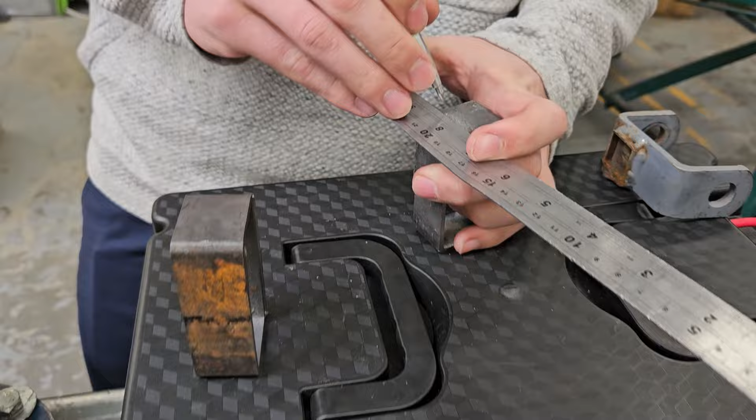So today, students have cut out metal, at least the outside parts. We're going to figure out the inside ones after, because as they weld, no matter how much time we spend in AutoCAD drawing, that distance might change. So let's head on over to the welding booth.

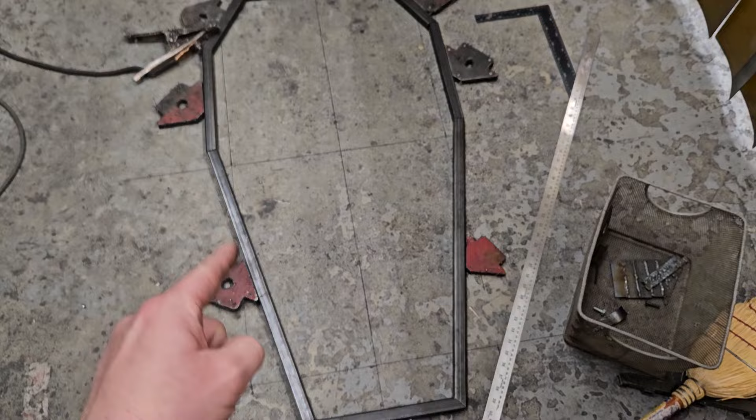So we got our pieces laid out on the ground. We used a Sharpie, a ruler, and a square to draw a basic grid so that visually when we're looking at it, does it look even? We're going to measure those gaps here, here, here, here, all those spots, and then we're going to weld. All right, Chris, what do you got for me?

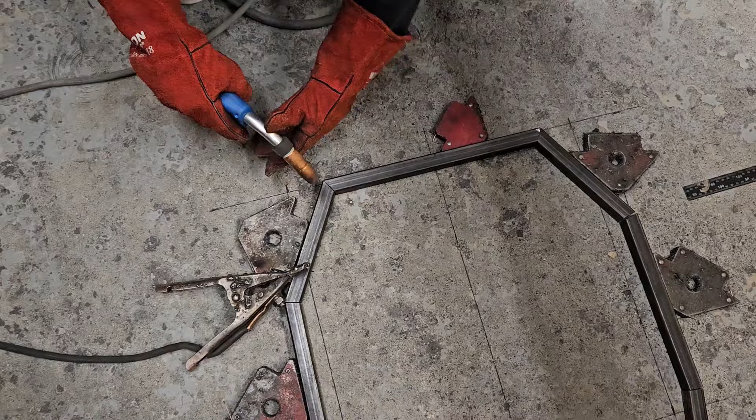Now double check. Did it warp in the middle of that weld? Check out our other spots. There's a little gap there now. What do we need to bend?

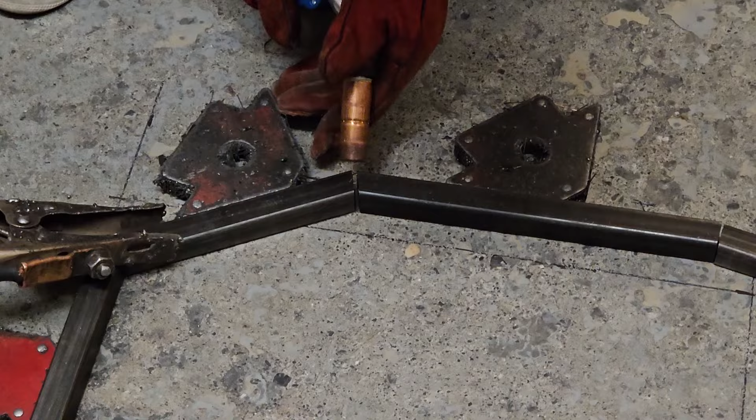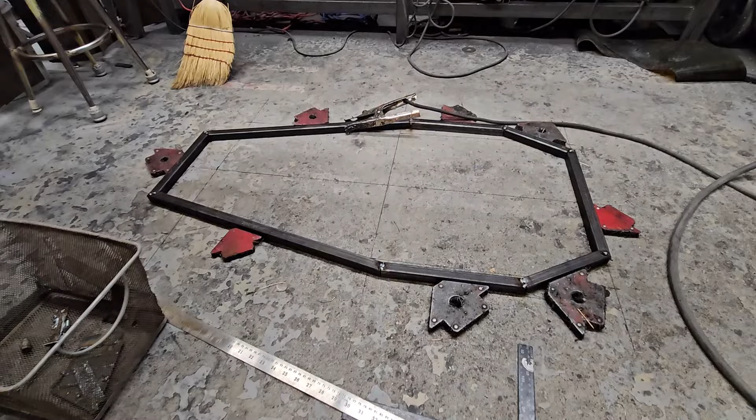Okay, so there's our basic bottom frame.

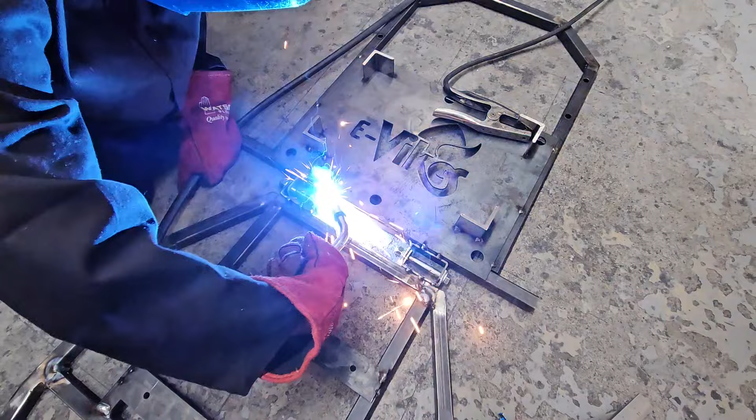Wow, it's gonna bend. Sweet.

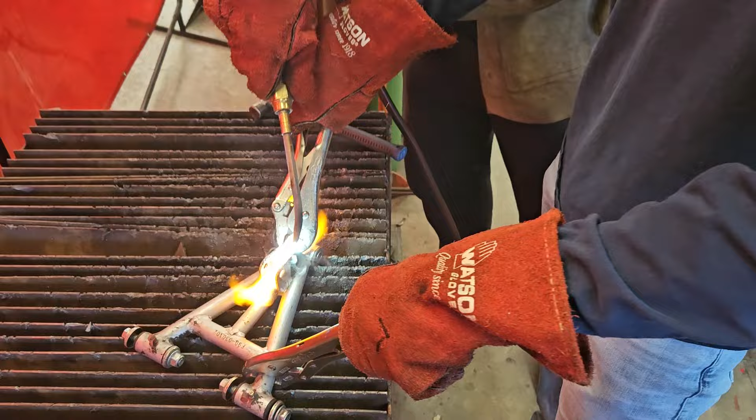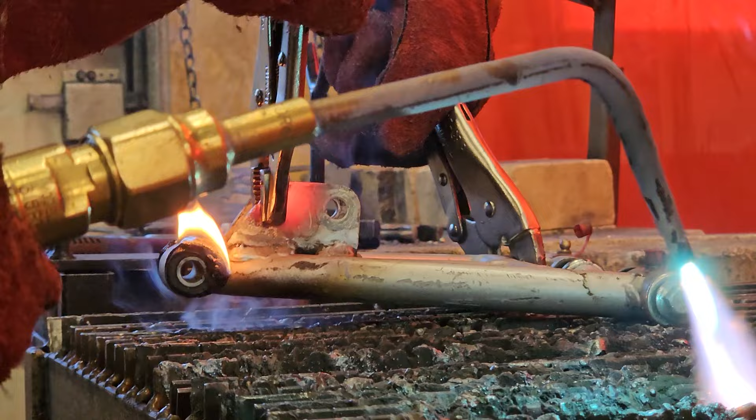Oh no. I've been checking. There we go. That's gonna go here. One of these and one of those is gonna go there.

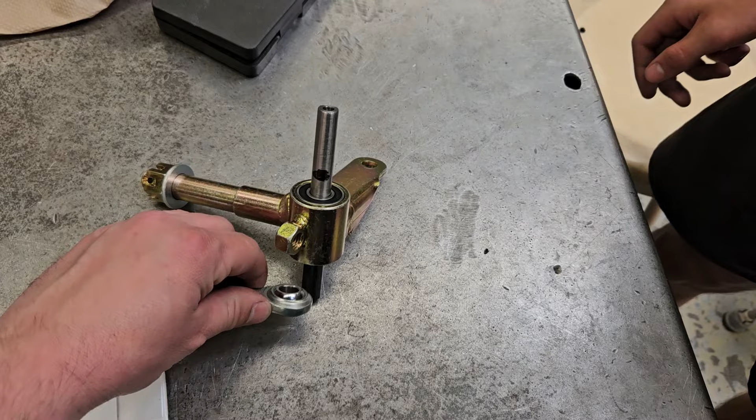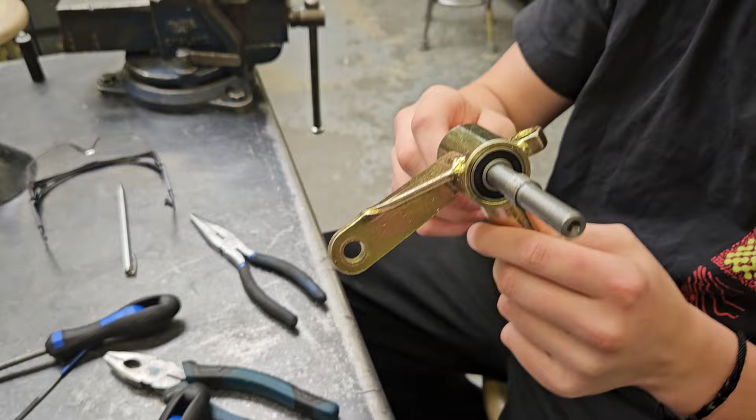Okay, let's throw on the tie rod ends. One at each end. Let's take a look. How's that gonna look there?

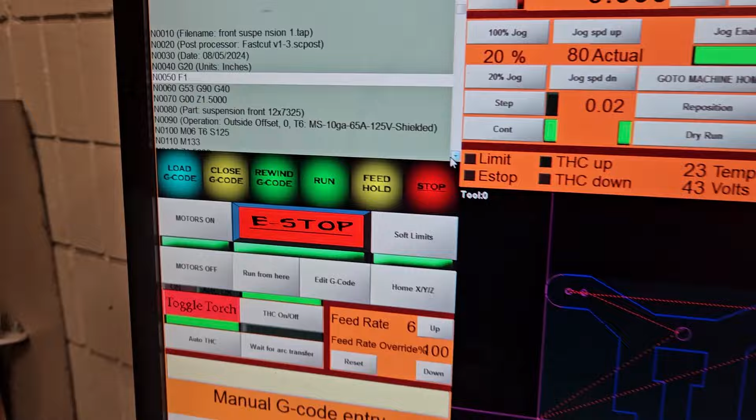That drawing's been converted into pathways and G-code and stuff. Let's send it to the printer. Did I say printer? I meant plasma cutter.

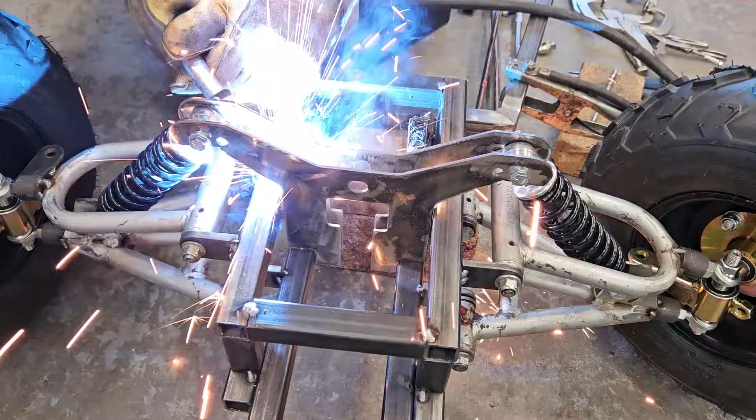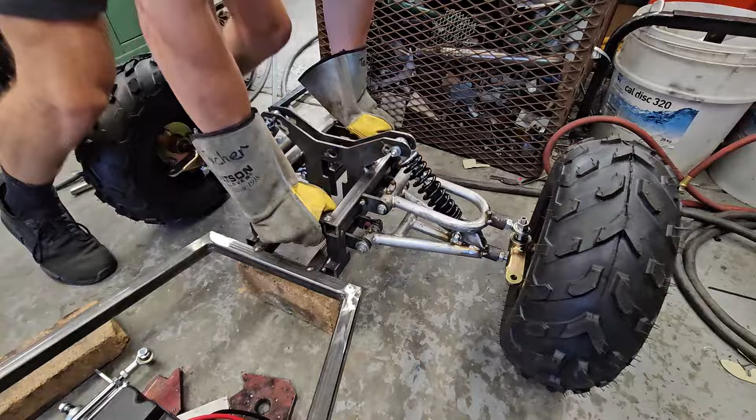We're just testing the wire.

Yeah, it's done. The project's... No, it's not done.

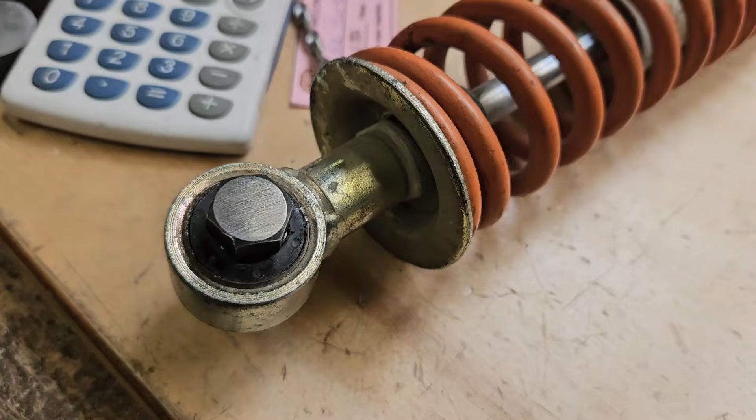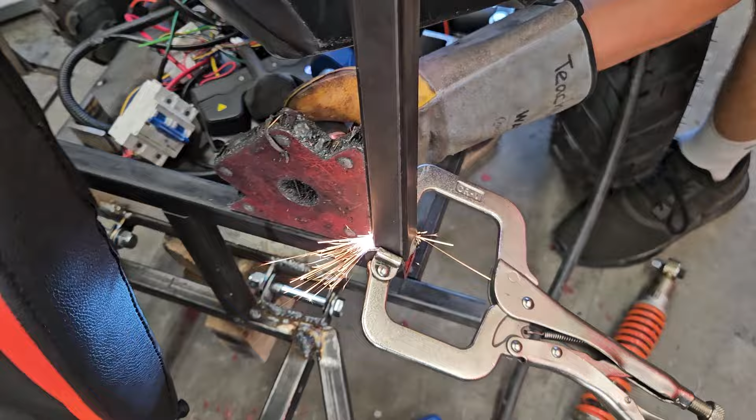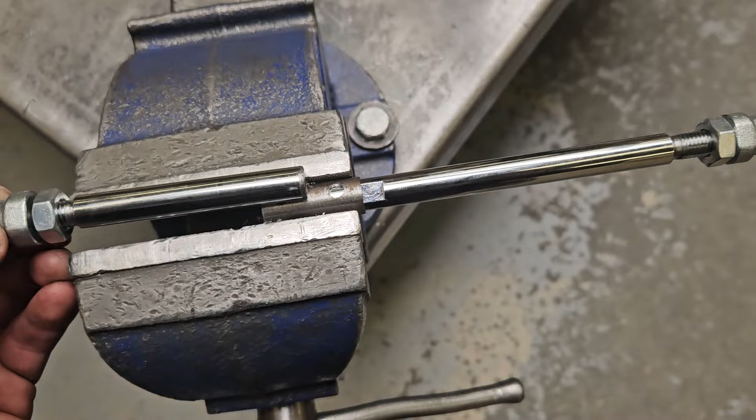So this tie rod, we had to shorten it a bunch. And instead of just welding it together, we're going to put a sleeve over top, which we've drilled a hole through the top and through the bottom, allowing us to weld around it and a little bit right here too, just for some extra strength. So that's going to go to about there.

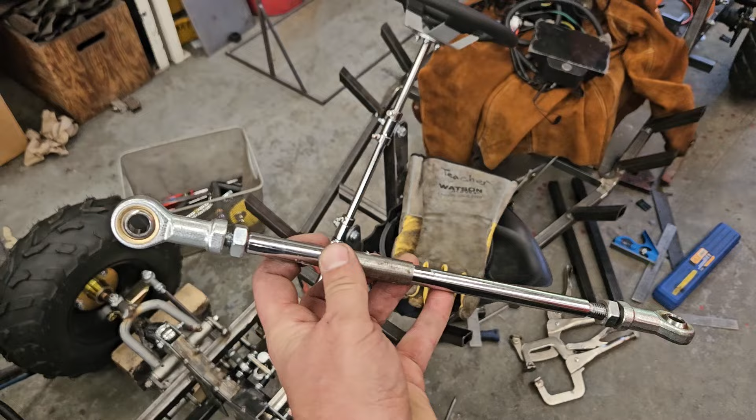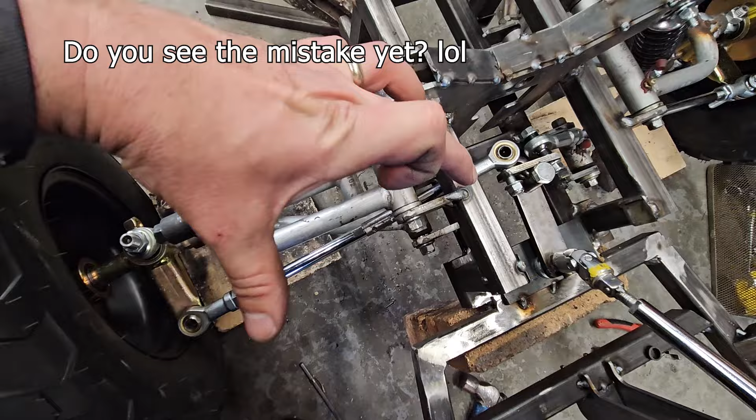Okay, so that's just a test fit here. The length from center to center is supposed to be roughly 13 1/8. Okay, so we have our test fit here. These threads and those threads will allow us to either make it longer or shorter, so we still have some room to play. And with the magic of film, it's all together.

So a couple tack welds for now, and then we can test it. If we're happy, the kids can weld all the way around. There's welds inside each of those holes and on the edge. This should be strong enough for that.

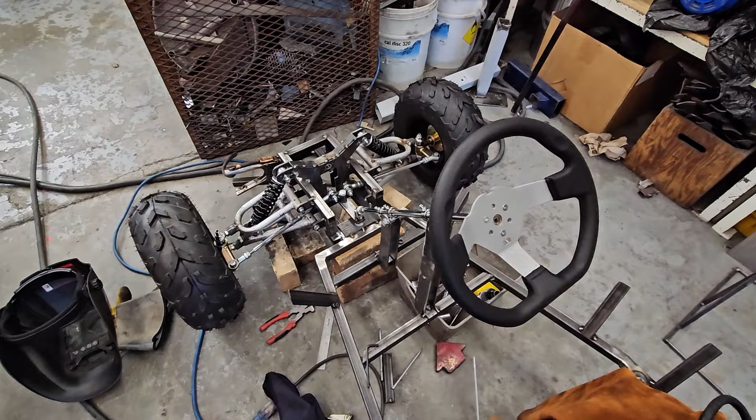We made a mistake with our planning. Let's turn left. Wait, no, let's turn right. Oops.

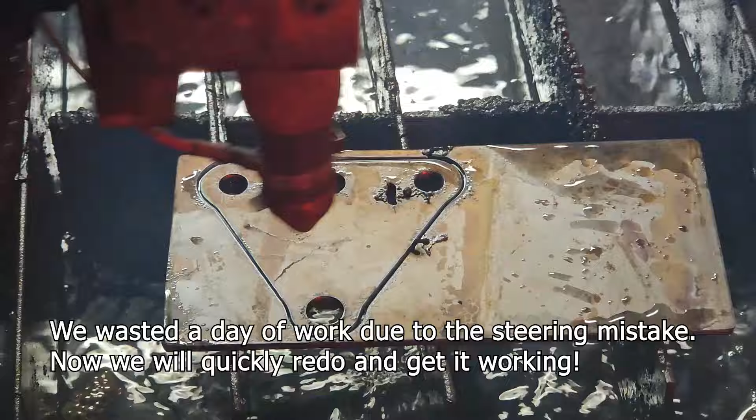I'm not using this tool right. Yeah, it looks like it'll do a thing. Okay, so that's been replaced. It's not welded in yet, but things are coming together.

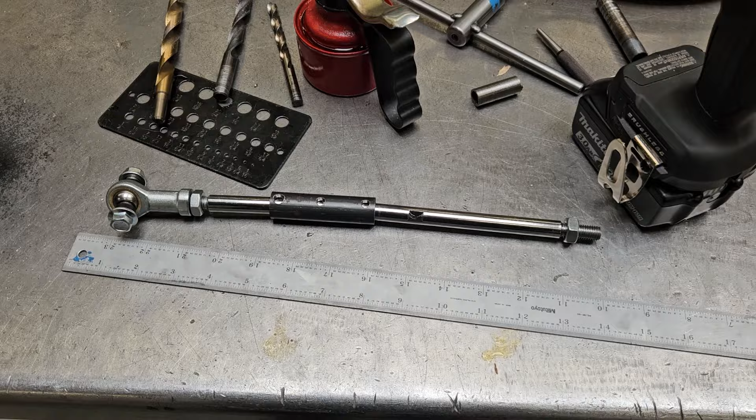I'm done for today. Like going home or just tired? No, I'm done working for today. Okay. I'd say cleanup actually. Yeah. Can you return that where we got it? I can. Thank you.

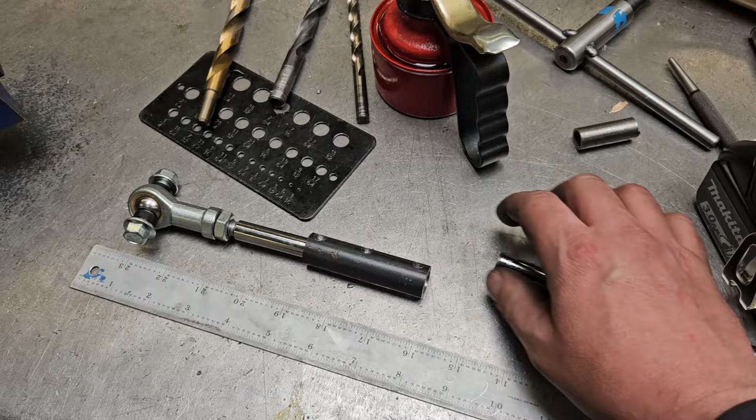Okay, we had to make some more solutions. London helped us create that piece. Since we don't want to just weld there to there to there, because it wasn't long enough, here's another one of those things to do some more of those rosettes.

They've been busy working instead of filming. This thing is coming together.

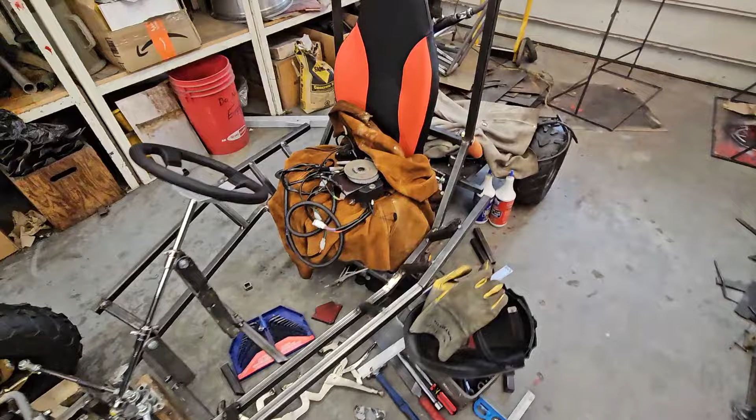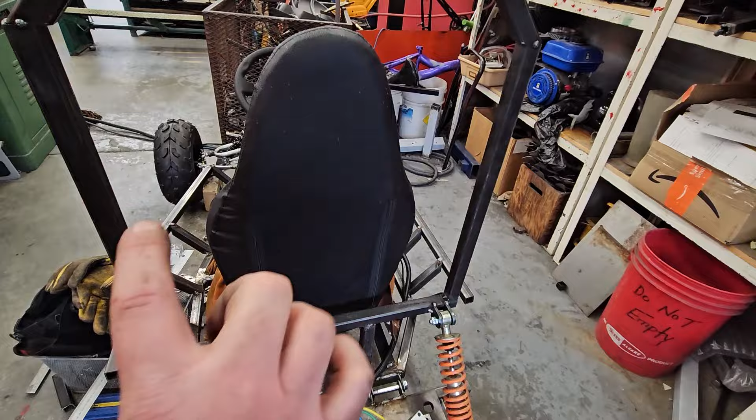Now we need to put something here to mount that and this, safety. Anyways, that thing. We've got a big piece here that's going to hold that, and some decoration.

This piece is ready and the design is drawn. So a thing's going to go there, the switchy thing goes there, and we filled that in here.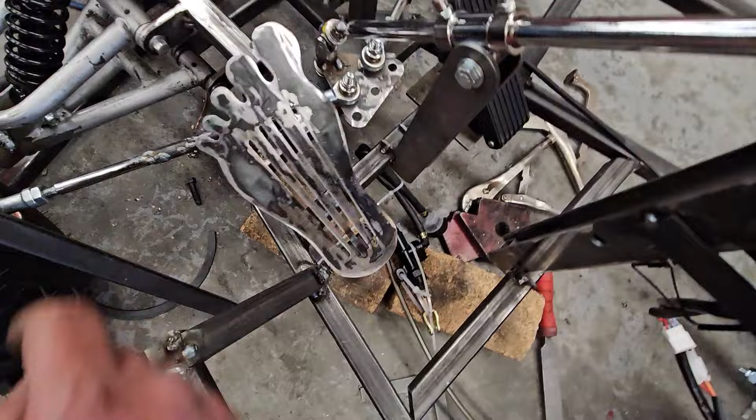So here's the thing. I had some of my juniors build me a foot. We still have to attach that to the actual brake stuff. We've got this just not quite tight on, but our gas pedal, slash acceleration, and it bounces. So we got some bounce in the back, some bounce in the front. I think it's gonna be okay.

Our steering actually works. It's pretty heavy steering just because of the angles, Ackermann, camber, whatever those things are. We're reinforcing here. There's gonna be one more piece that goes from here to there so things are strong. We're thinking maybe a giant roll cage. No, that's just gonna be more weight. This thing's getting there.

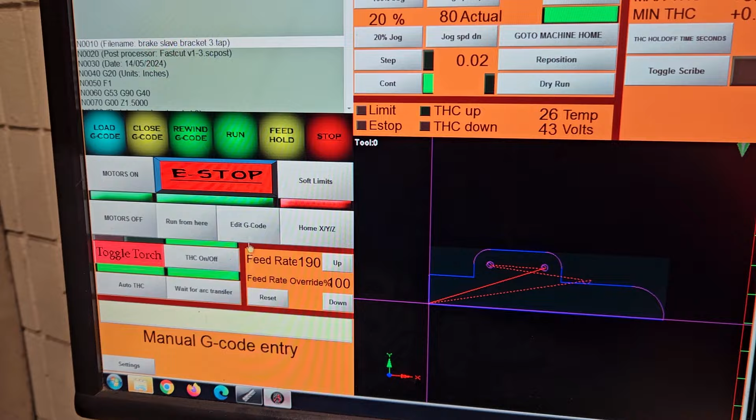All aboard the struggle bus.

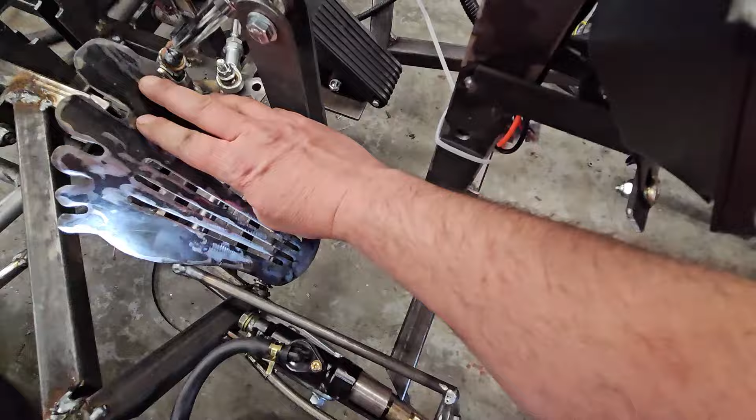Okay, today's updates. Steering thing's welded. You gotta give it a little bit of muscle, but we'll figure that part out. At least it turns. Second thing, if you put your hand here, your foot here, then that's gonna give you a little brake thingy. We still need to bleed the brakes and figure out that.

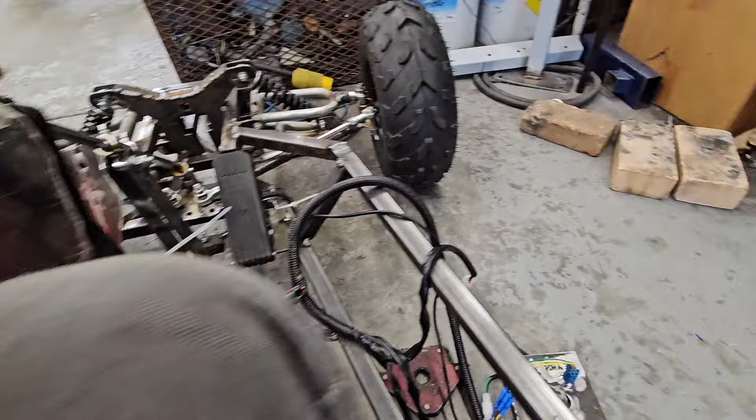What else have we done? Now that little readout thing will eventually say something. There's a bunch of cables, and over here, that's where we're gonna do some other stuff. One of them, the one on the left, you put a key in, you can change gears. It's kind of, sure, that's cool. And the other one is magic. I don't really know what that one does.

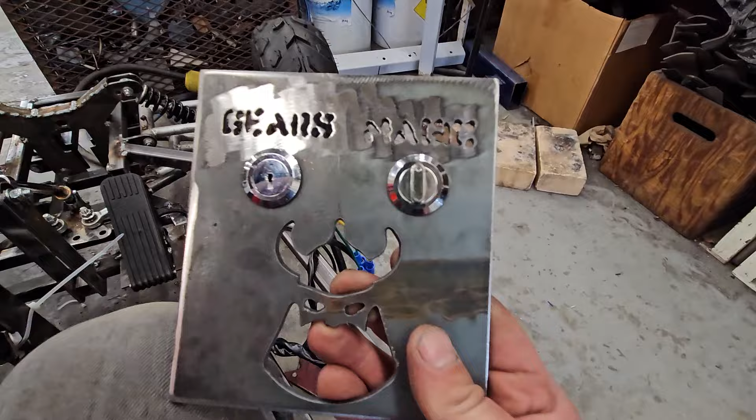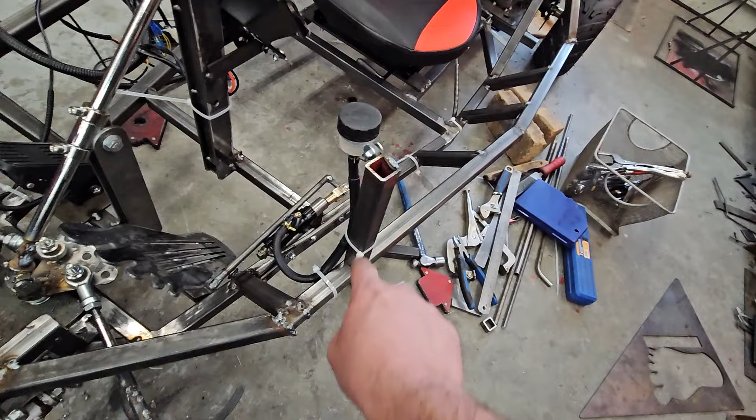We're gonna find out. These diagonal pieces got welded on. Of course, everything's gonna need finished welding, but we'll get to that. Oh, little reservoir for magic fluid goes in there. Back end, what else happened to the back end? I think we talked about that. Oh, now it's safe for my students to drive, because

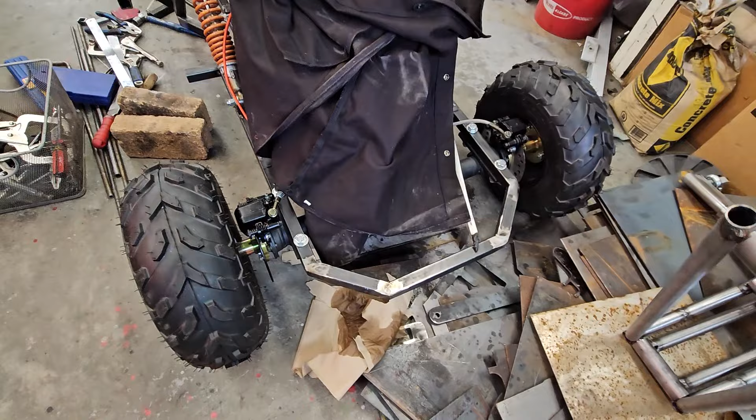Licensing. Anything going on over here?

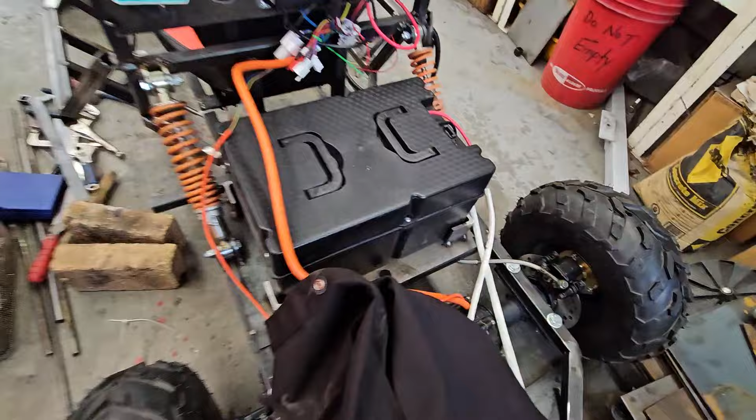Battery fits. Tomorrow I believe we're going to make a hold down, basically the same as what you'd find in a vehicle. There'll be a piece of metal with a hole in either side and just a really long bolt or threaded rod that you can tighten up, and that's just going to clamp it down. If not, bungee cords.

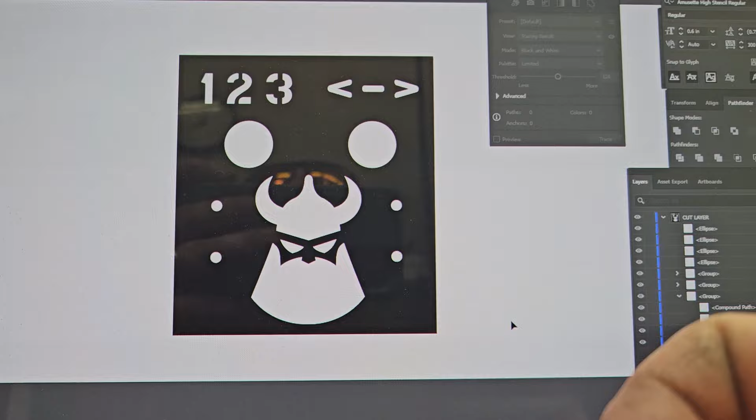So here's the thought behind this one. We got 2 buttons, one there and one there. The top button over here has a little key in it, and you have positions 1, 2, 3. I think that's speed or gears or anyways. And then this one, there's a dial with no key in it, but it's a dial. And I believe it's to go forward, neutral, reverse. So it's one of those.

These dots over here, 1, 2, 3, 4, this is so that we can make a hook and stick them in the hole in case we want to attach the key to a lanyard or a key ring and put it here so we don't lose it, it doesn't rattle away. That one's just for symmetry.

Doesn't that look cool? For those who've never done this before, you load it up into SheetCam TNG because that's what we have. You go to Operation Plasma Cut, choose the correct layer, which I've named Cut Layer in my original software. Click. Find tool number T6 that matches 10 gauge, which we also call 1/8 inch, even though it's not exact, but it's good enough. Click that. I like those settings. Press OK, and it will generate some tool paths.

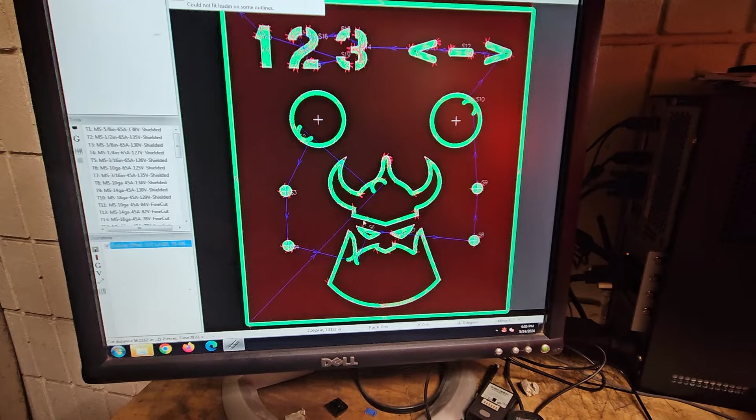Now, is there any that I don't like? Let's zoom out. I don't like that one up here. So we're going to move that. Click. Bring it over here, because I know there's going to be extra metal. There's going to be no metal here the way I set it up. We're then going to generate the G-code, save.

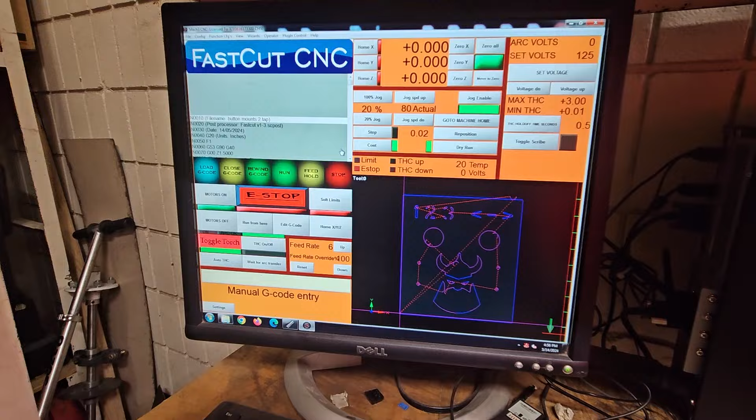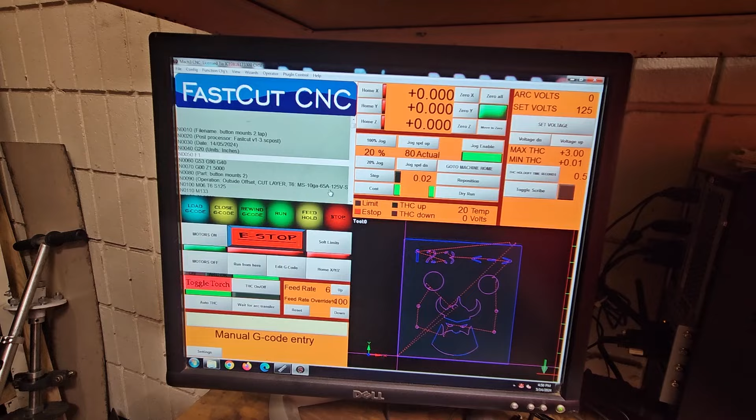Yeah, let's make sure everything matches up. 125, yes, 65 amp. That's going to be on the plasma cutter. Let's do a test run. I like to do a test run of just the final cut. Oh yeah, let's press run. That would help.

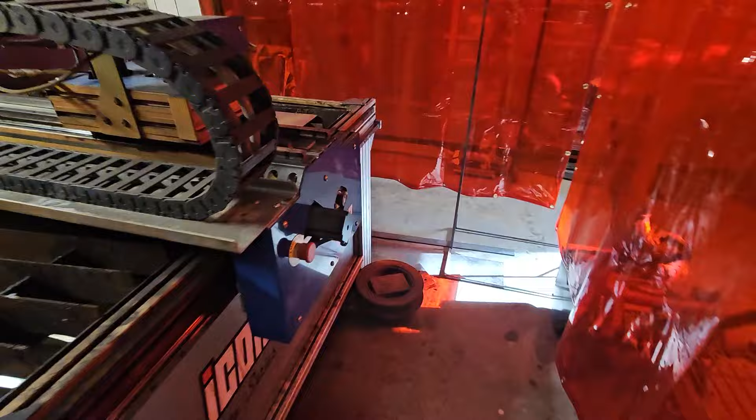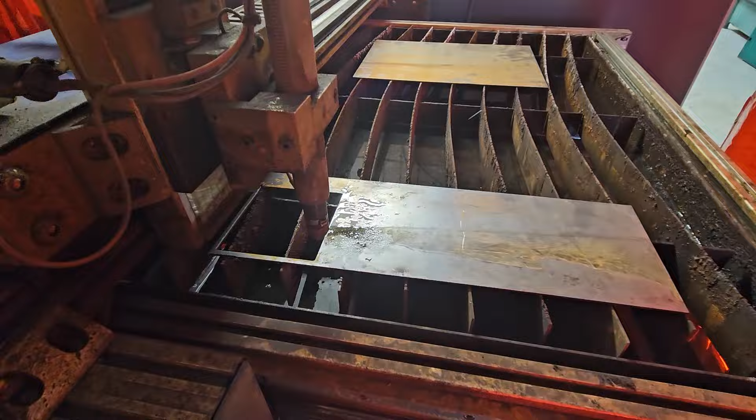Mostly to see will the final part actually fit. Real close, it was a little close to the edge, so I'm just going to move the 0 up a centimeter. Let's go.

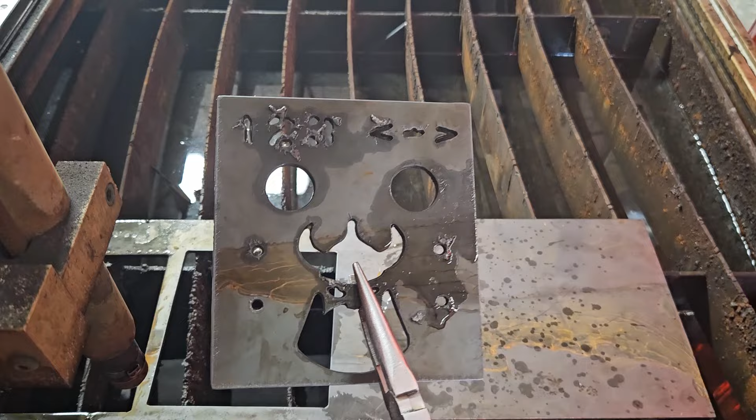One, two, three. Forward, middle, back. The Viking.

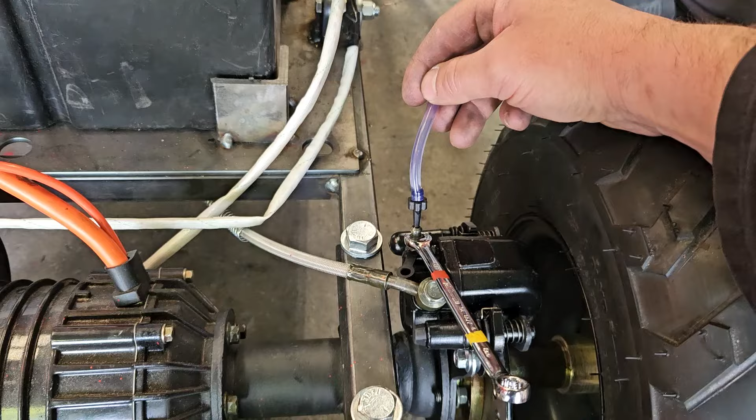Yeah, keep going, Chris. We still got a couple bubbles. It's getting way better than it was before. Two more.

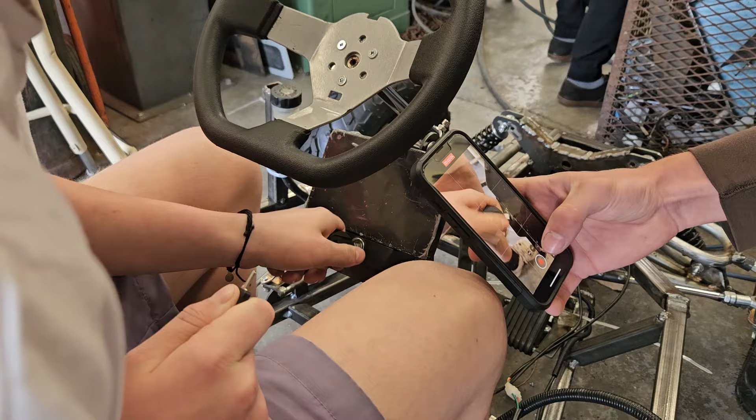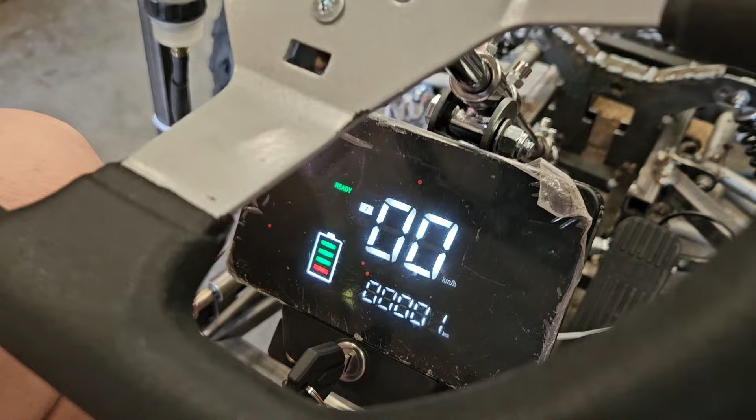First one's going to be that panel. Let's start by looking at, do we have any weird error messages? We're currently in gear 2. Chris, let's put the other key in, keep it on, and let's double check that the gears change when you do that. Yeah, 2. So let's just go to 1, be gentle with it, we're going to do a slow test. There we're in 1, now go to 3. Good, so let's start with gear 1.

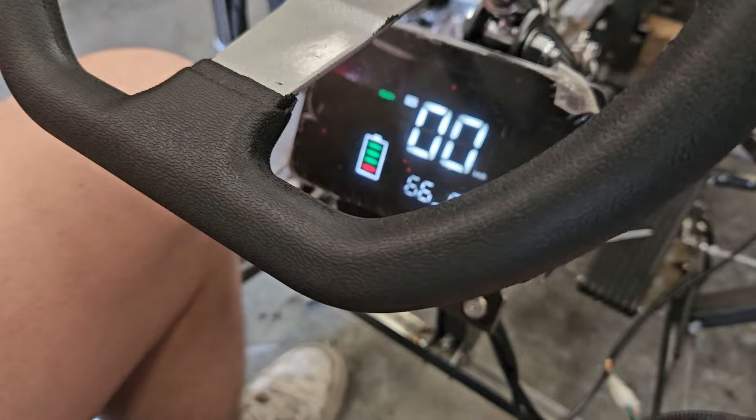Excellent, next one is to test this one. This is our reverse, at the moment it's in neutral. Park. Reverse. Cool, well, we know things changed.

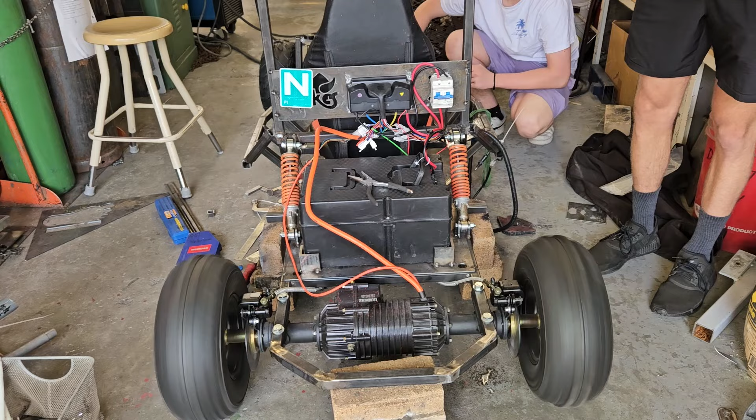Good, so just nice and slow. Why are the brakes rubbing? We'll figure that out, not tight. Beauty, gear 2. Does it let you change gears while it's running? Yes. Is that 2? Good, 3.

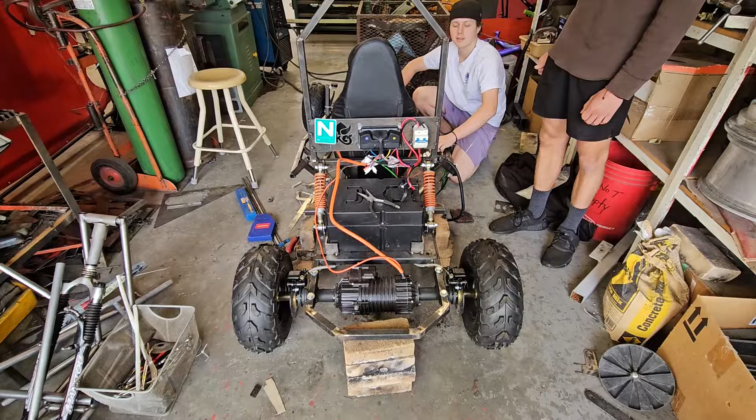Okay Jack, you're gonna go over to the brakes. Okay, test. We're gonna try faster. That'll do.

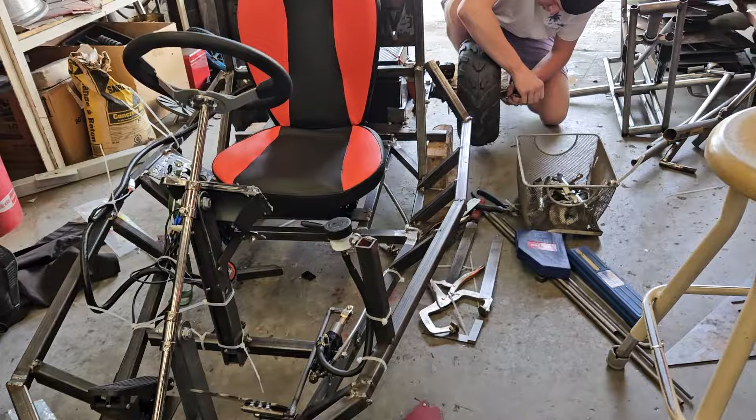Hey, first relax. Back it up slow, Chris. Watch the steering, it's not as nice as a car, it's very heavy steering.

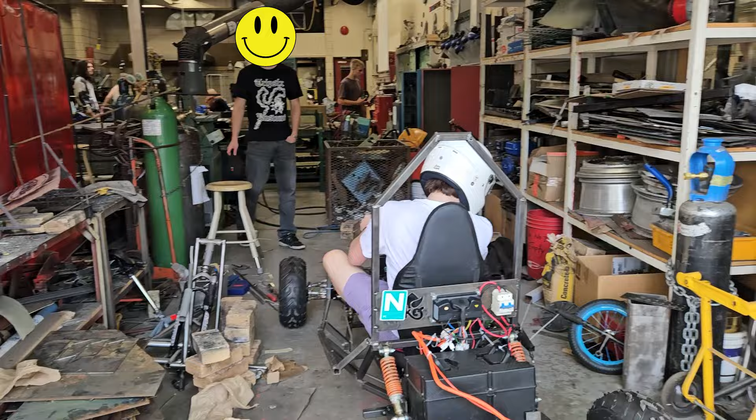So we got a little bit of squeak on those brakes. And we'll slow to the tennis courts. Nothing's tightened all the way yet. There we go, nice and slow, see what you can do. So this is where you're going to be listening for what's rubbing. Watch that corner.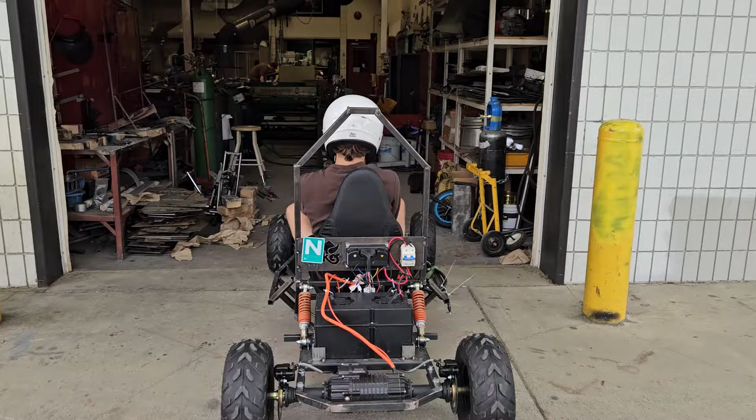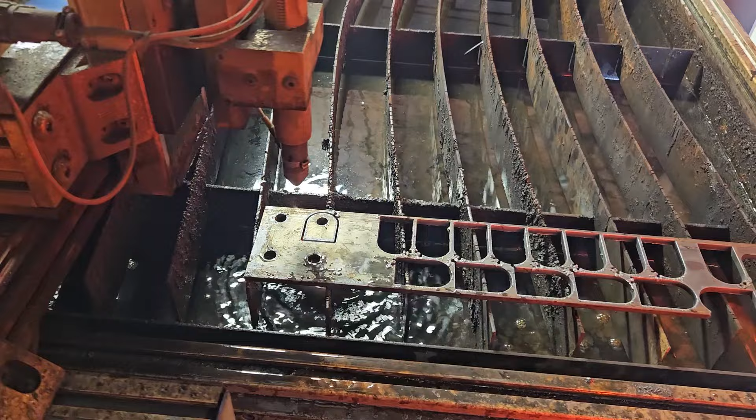Now that we've done a test drive, it's time to tweak and maybe change a few parts. We're gonna add some more shock mounts to the back so it's adjustable to get a little bit more height in the back.

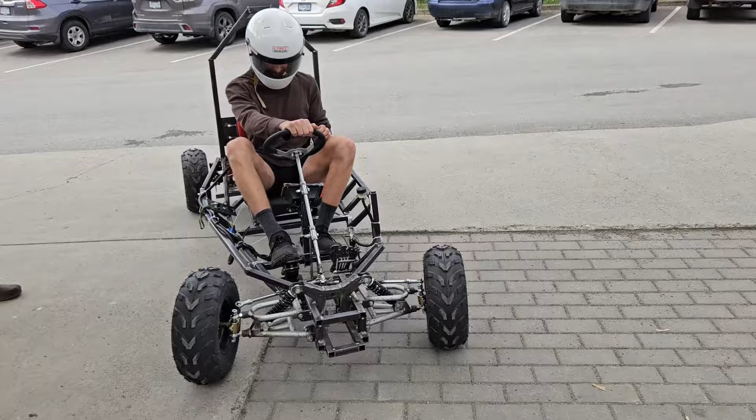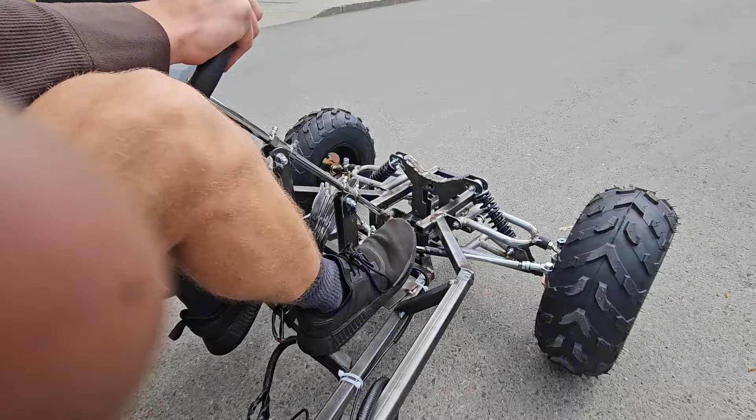Okay, now parallel park. This is the only time I'll let you drive up the thing without yelling at you. Something's clicking there, hold on. Go, rip. Off into the sunset.

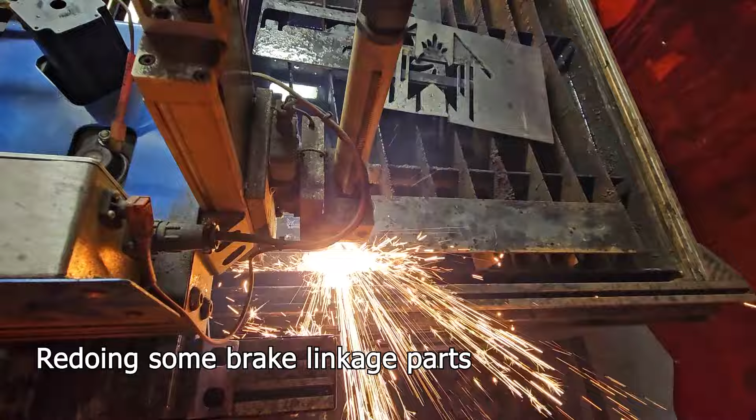Tweaking. Jack, let her rip.

So while driving, we saw our castle nut washer fall off and the bearing completely fell out. This is just during a test drive, we weren't even going fast. Well, maybe a little, but that's not supposed to happen.

So these brakes are tricky, we're not sure if there's more adjustments you can do here. We did bleed them, that was fine, and we do have them working a little better than yesterday. Our little system here, we've got the reservoir up top. We've done a little bit of grinding here so that when it gets pressed in, it goes in all the way.

And this little fork, I'll call it, isn't actually bolted on, it's literally just being pushed by this piece. So we originally had one that was just straight, but that meant that bar was too high, so we did an angle. It's got adjustment holes, as well as, because this is a tie rod, I can also do fine tuning adjustments. That comes over to here, so the foot can get down and there's still plenty of clearance.

So push down all the way, it doesn't hit anything, but it does force that piston literally tight, and I give it a little more. This little washer, I had to add that on because the fork was sliding up and down, so it's just kind of rubbing. You can see that here.